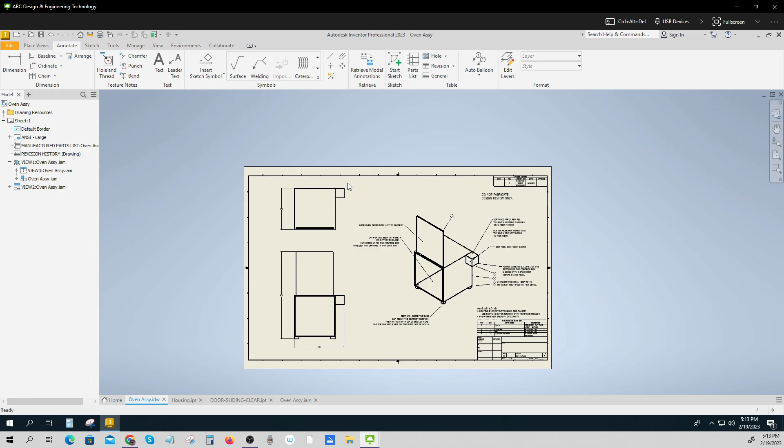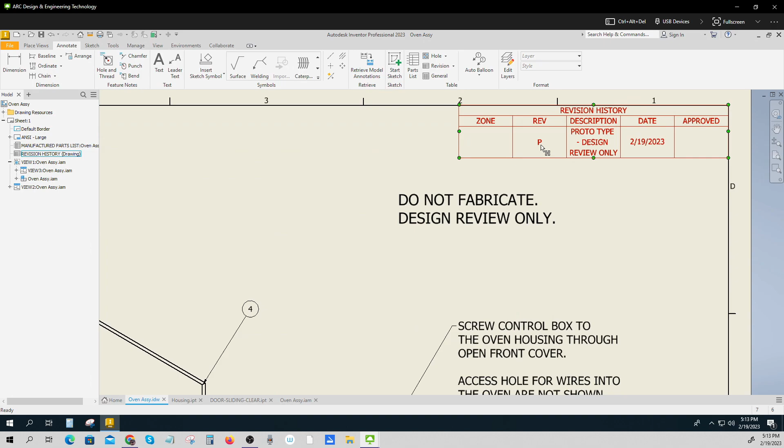Let's take a look at what might be used on an annotated assembly drawing and with a bill of materials, and how it might look using Inventor. Remember, this is for design review only, so there should be a note saying do not fabricate, design review only. I've chosen to use a revision P—most places I worked had a P-number to indicate prototype only, not part of the normal revision control.

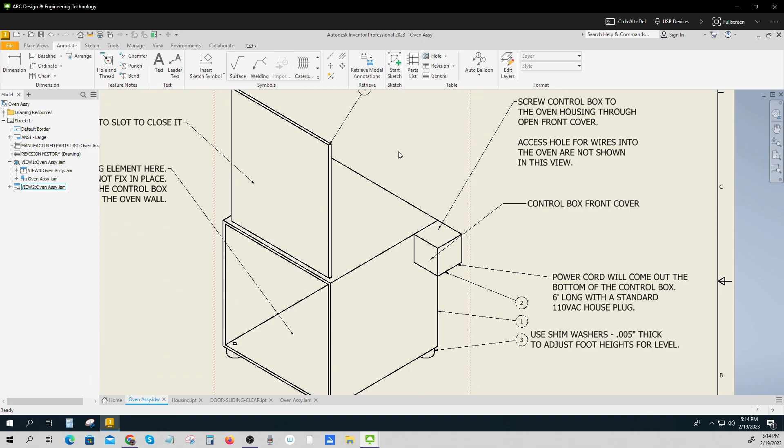So you can add those two things on there. Those are important, and there'll be a video on how to do it. The next thing you'll note is that there are item numbers pointing at each type of component: here's a control box, here's the oven housing, here's a foot, here's a cover or door. So there are 4 things, and those are all the things I'm going to manufacture.

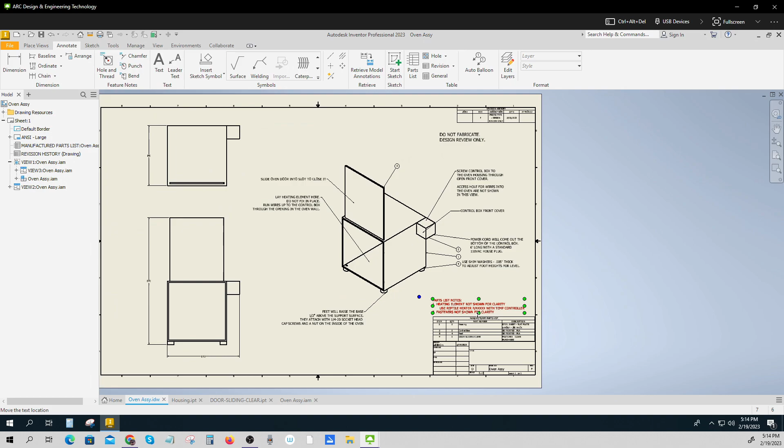So: housing, control box, foot, sliding door. I could have put the other components in here, some screws and these, but I chose on this one to use it as a note. Now you have components drawn for those, so you can put them in. I decided to just say heating element not shown for clarity, and then say what it is.

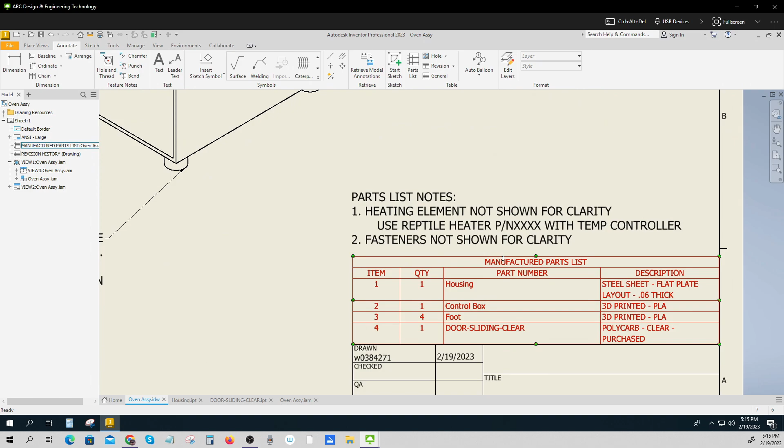So these are two commonly used ways of indicating what is getting assembled and all the parts of your design. In this one, I'm going to ask that you also have your little heating pad here. You don't necessarily need the screws. And then I've got some annotations that tell somebody what's going on.

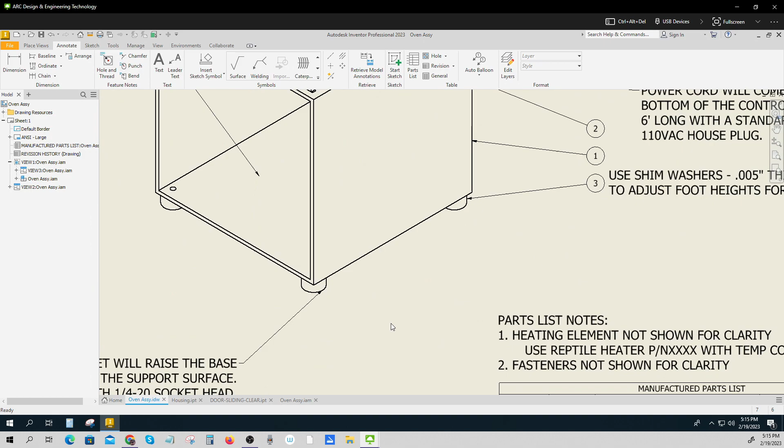The feet will raise the base about a half inch. They attach with 1/4-20 socket head cap screws and a nut on the inside of the oven. So I have to be thinking, how am I going to attach it?

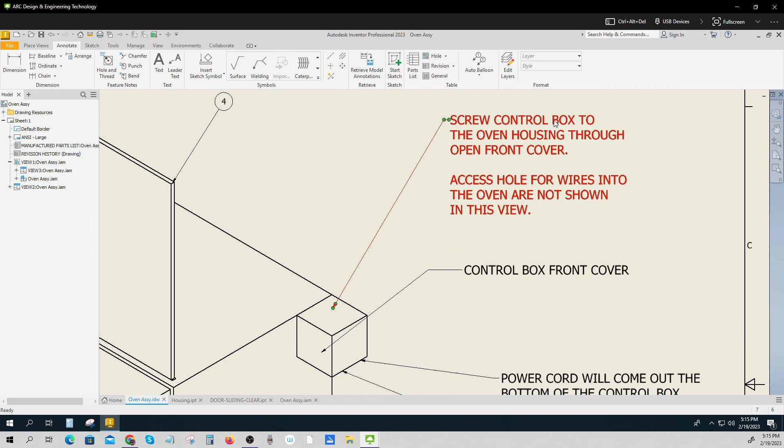As another example, I'm going to screw the control box to the oven through the open front cover. And then to show them where that front cover is—the front cover is right here. So I don't have that really highly designed, but it lets the designer know.

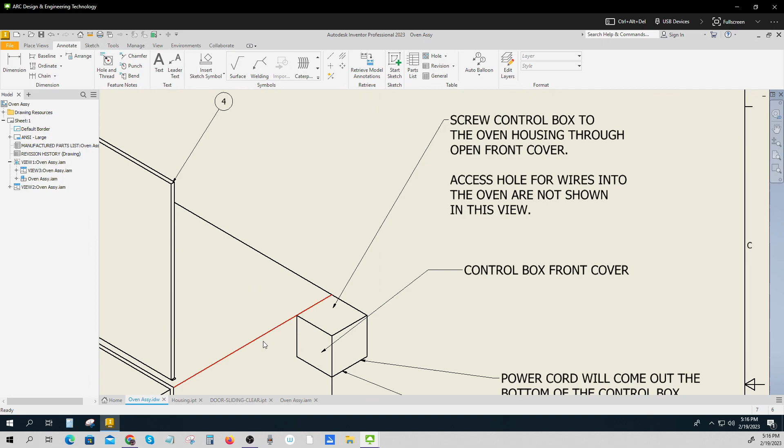And there's an access hole in the oven that's not shown in this view, for the wires to go from the heating pad into the control box. And then down here, the power cord will come out the bottom with a 6-foot cord. So I'm adding just a little bit more detail than I had before.

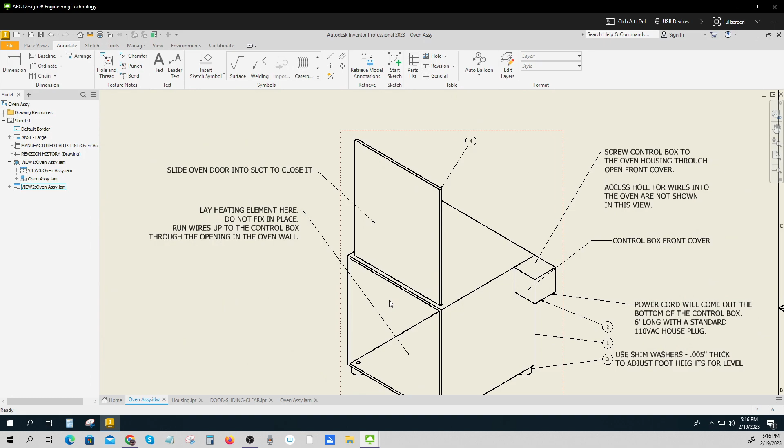I've chosen just to have a piece of polycarbonate that'll just slide down. It doesn't even really need to seal all that well—it's okay for air to get in and out. So this is a sliding oven door that just goes into that slot. It's a piece of polycarbonate. How do I know it's polycarbonate?

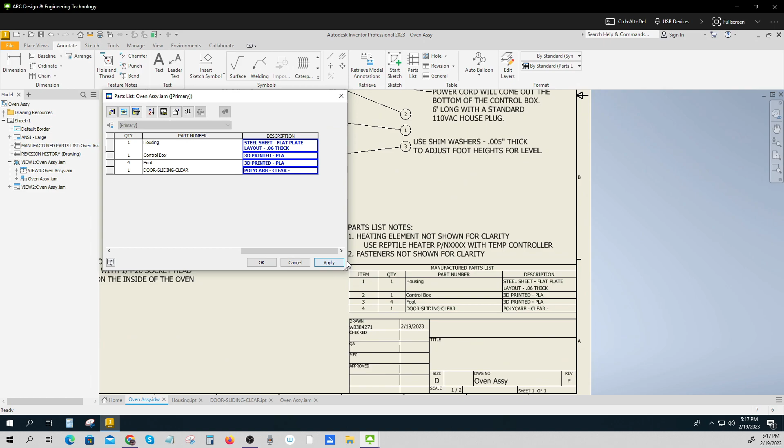I put it over here. I said the door, which is a sliding clear door, is polycarbonate clear. It says purchase, but I'm going to change that because that's a manufactured item, and there will be some small amount of work I'm going to have to do on that—probably some little chamfers and maybe cut a little handle in it.

I'm also saying that I'm going to use shim washers. Those are very thin, round washers. They could be made out of anything, 0.005 thick, to adjust. If you have 3 feet, they'll always seek level, and that 4th one is very hard to make level. So I'm saying you just put some shim adjusters behind it and then tighten the bolt.

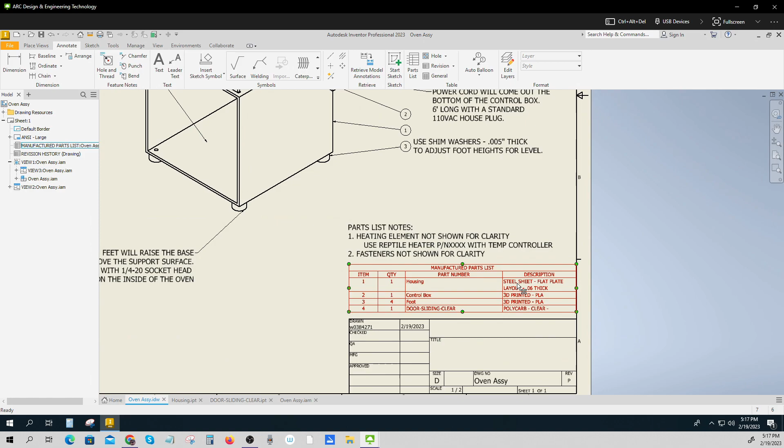I'm also saying that this housing is steel sheet and that I'm going to show a flat plate layout, 0.06 thick. And then 2 other pieces are 3D printed. So now I'm talking a little bit about the materials and how I'm going to make those. I still don't really need detailed parts yet—my detailer will do that later on.

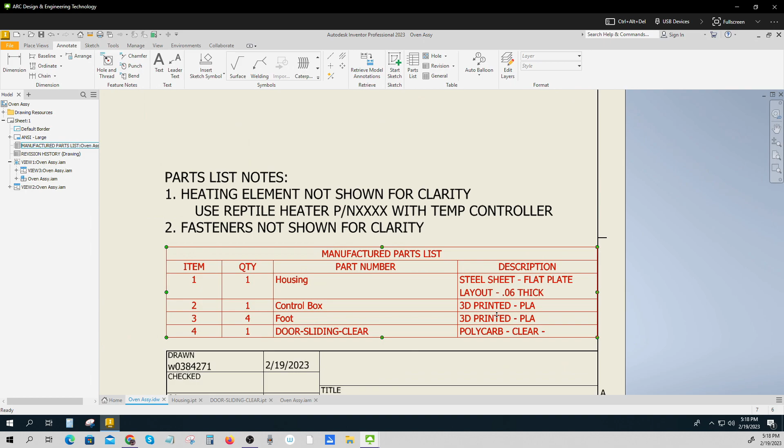I have to give enough information that my detailer knows what to do. I'm also telling them that I'm just going to lay the heating element there, and I'm not going to fix it in place. I'm just going to put it there and then run the wires up. So the detailer knows that they don't really need holes or glue or a clamp or anything like that. You could have those things, but I've chosen to just use it as a note.

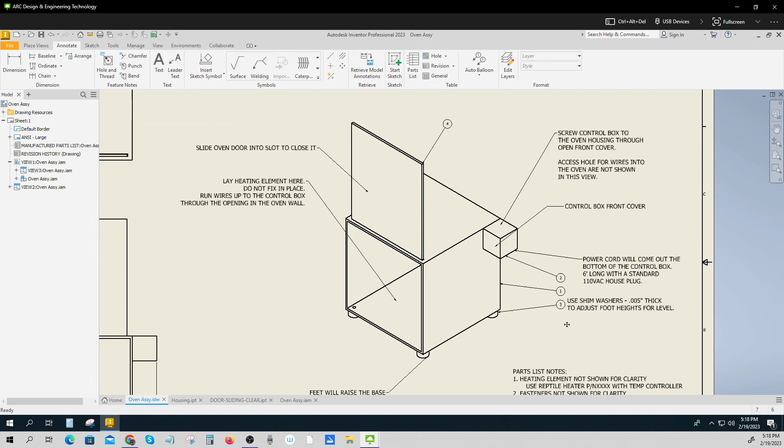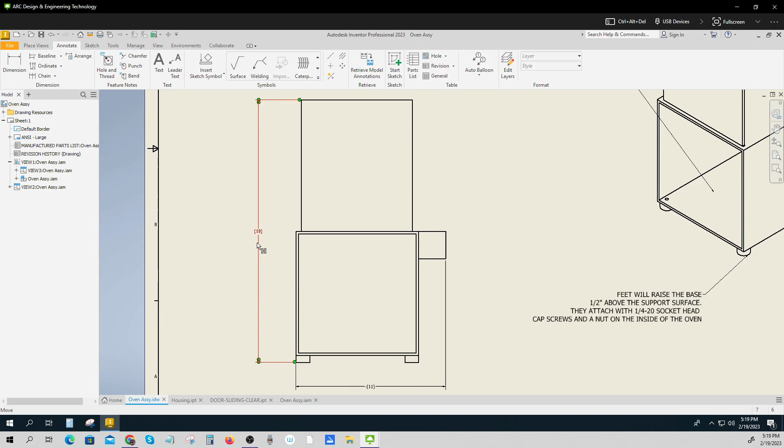So that's what we mean by an annotated drawing. There's one other set—somebody'd kind of like to know how big this is, particularly if they have to lift this door out. How much room do they have to have up above it? If this is sitting on a shelf, how high does the next shelf need to be? So I put the overall dimensions, in parentheses, to suggest that they're not perfect and they're identified elsewhere—just a reference for you.

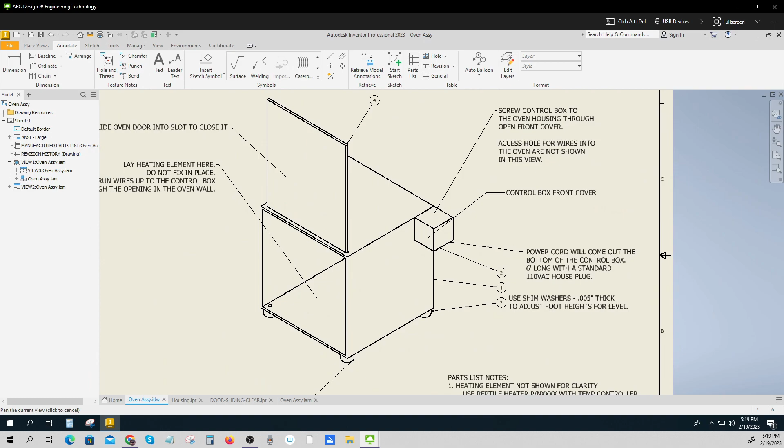And then I made a top view, so I've got a front view, a top view, and an isometric view. I can pretty much see everything. I see that this is pretty well lined up over here on the back. I haven't given much detail to this, I haven't given much detail to anything, but it's one step more than we did in your concept visualization.

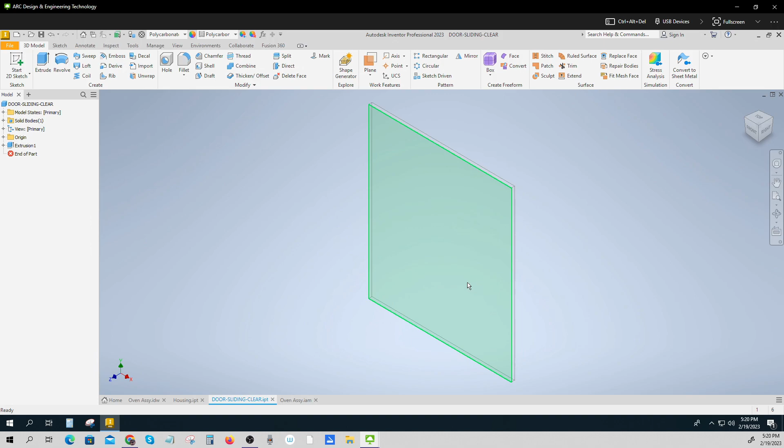Now we're adding enough detail that we think a detailer or a designer could go to town and make these individual parts, maybe even starting from your concept parts. They could start from here, make their own copy of it, and start adding things like handles and chamfered corners so they're not sharp, and maybe even a cool logo laser etched into it. In the housing, they might start all the way over because they said it was a flat plate layout, and this isn't one.

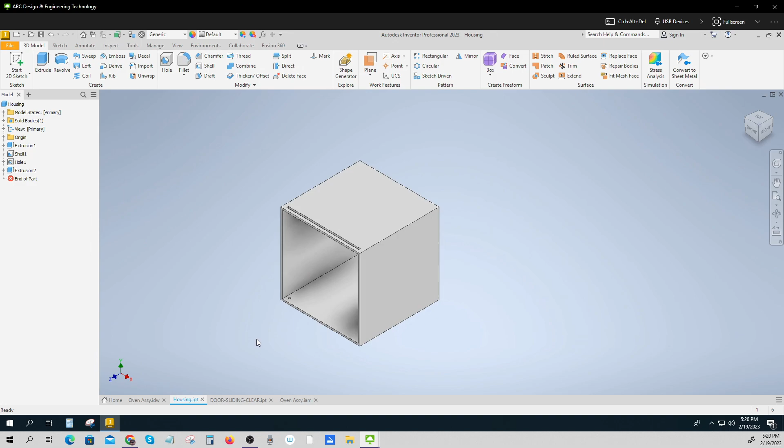So I'd have a hard time making this into a flat plate layout—I might have to start all over on this one. But that's okay, I can figure that out as I go. And then I know there's two other pieces that are 3D printed, and we'll be talking about what you need for a 3D printed part. Okay, so there we go—that's what we're talking about.

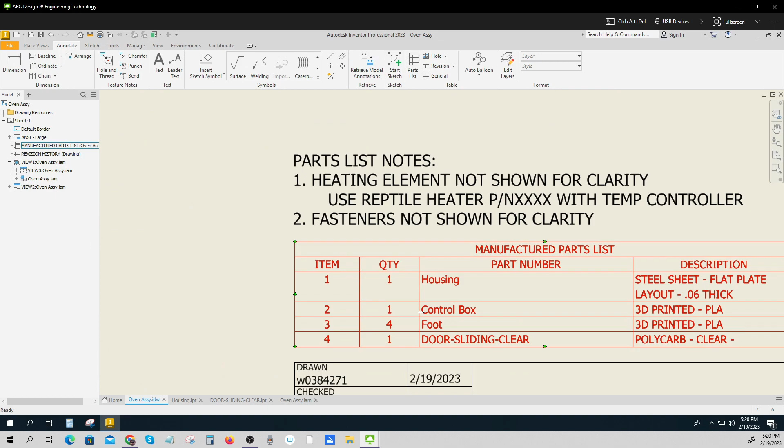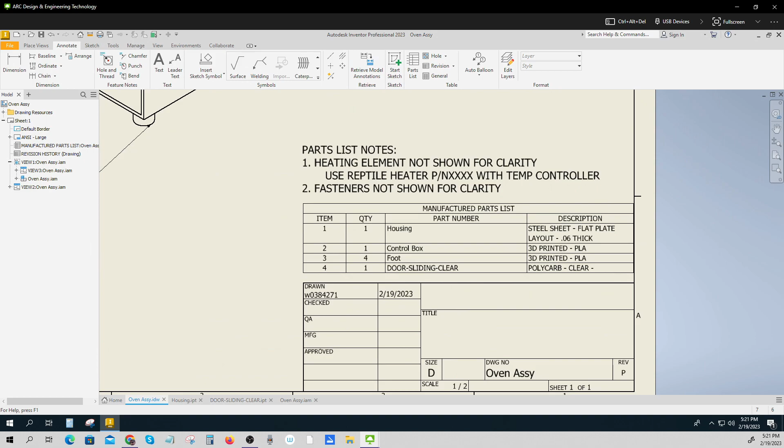Now, I haven't added anything to the title block. This should actually say what it is and might even have the company here. I'll go over that in the detailed video of how to do all this. All right, there you go—that's sort of what belongs on an annotated assembly drawing with bills of materials.